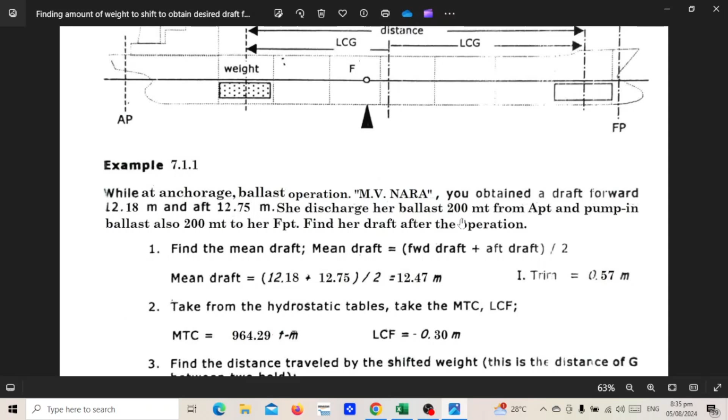She discharged her ballast 200 metric tons from after peak tank and pump in ballast also of 200 metric tons to her fore peak tank. Find her draft after the operation. So guys, like what I've explained earlier, that he's going to pump out water ballast in after peak of amount of 200 metric tons. So when he's done, pump out of 200 metric tons in after peak, then he will pump in fore peak tank of the same amount of 200 metric tons. Now, after the operation, entire operation, what will be your draft?

Okay, so let's start. Go to number 1. Find the mean draft. To get the mean draft, the formula is forward draft plus aft draft, divide by 2, then you will have the mean draft. So the forward draft is 12.18 and the aft draft is 12.75. You add these two, divide it by 2, then you get a mean of 12.47 and your trim will be 0.57. So let's check this, guys, with the program.

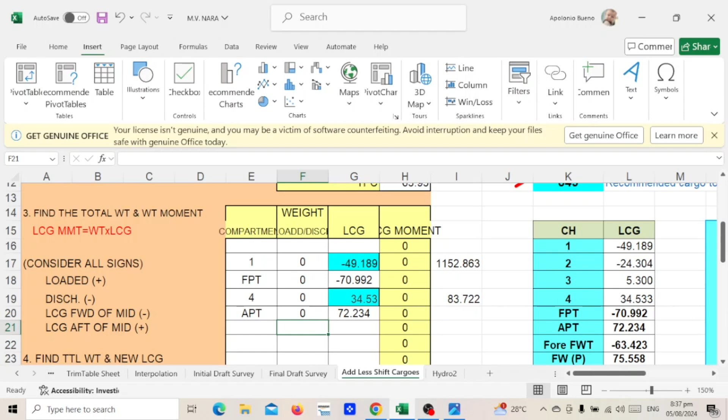Number 2, take from the hydrostatic tables, take the MTC and LCF. So when you say take the hydrostatic tables, it means the mean draft of 12.47. So from the hydrostatic table, we will go to check this 12.47. So we go to the hydrostatic table. Sorry, hydrostatic table. 12.47. Okay, let's go here. This one. 12.47. So we go up.

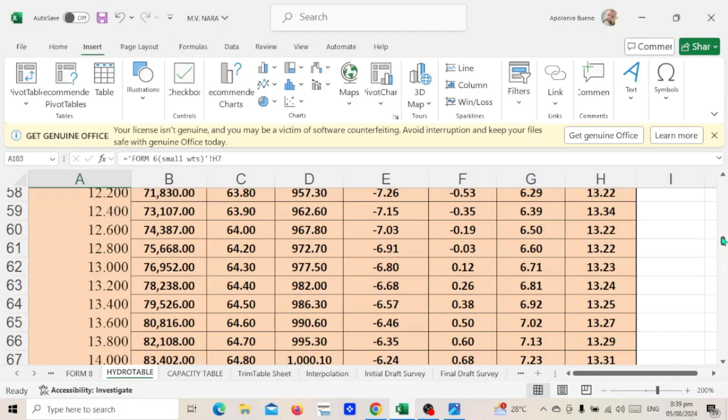12.47. So go up. So here, so 12.47 is in between 12.40 and 12.60. Okay, so the MTC is here, and the LCF is here, the F and D. So we go to 12.47. So 12.47 is between 40 and 60. So that will be D in between here and F. Okay. LCF. But we have already a graph here for interpolation way down below and here 12.465. Sorry, 12.465. 12.465. Let me check here. Here, 12.465. Meaning 12.47 run up and 57 trim. Okay.

So what will be the MTC? MTC is 964.29. 964.29. 964.29. That's correct. And LCF is 0.30, negative 0.30. Okay, and LCF is negative 0.30. Okay, confirm.

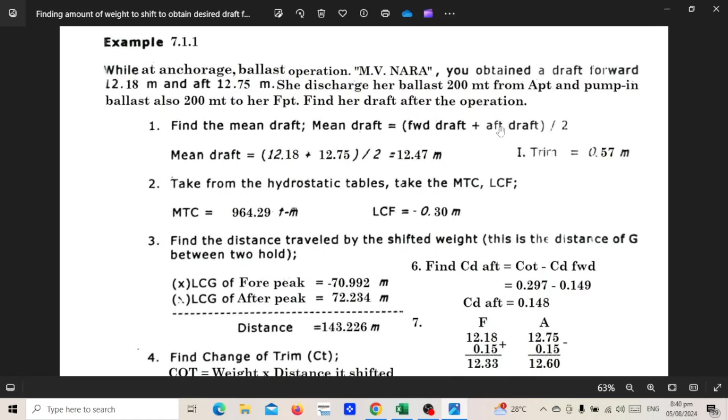So number 3, find the distance traveled by shifted weight if this is the distance of G before between two holds. Meaning if this is your after peak tank and this is your fore peak tank, from the center of your fore peak tank and the center of your after peak tank, this will be their distance.

Okay, when you say LCG of fore peak, it starts from the center of flotation or at the center, going forward to fore peak at the center of the tank. So that is your distance of your for peak or LCG.

And the LCG of the after peak tank is from the center of flotation or from the center or amidship going to the after peak tank. That will be your LCG of your after peak tank. So your LCG of after peak tank and LCG of for peak tank, you add this together, that will be your distance from after peak to for peak tank.

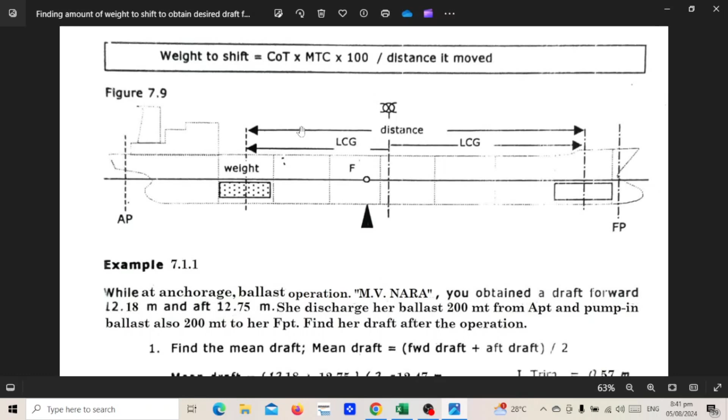Okay, so that will be your distance. So here the LCG of fore peak tank is negative 70.992 because it is the forward part, and after peak tank is 72.234 because she is in the aft part, that's why it's positive. So you add this together, your total distance would be 143.226 from the middle of the fore peak tank to the middle of the after peak tank. So that will be your total distance.

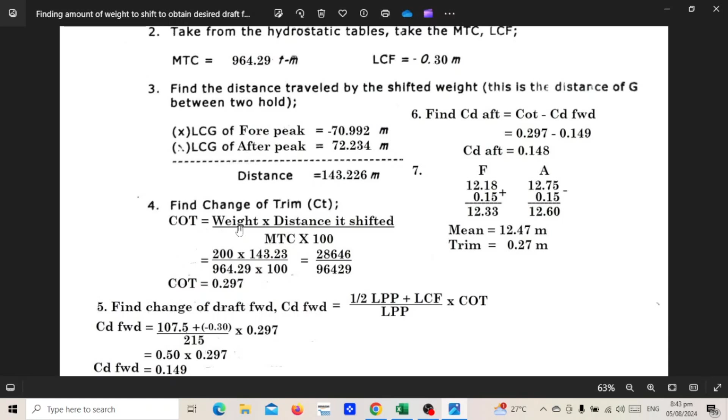So we go to number 4. Now we find the change of trim. The formula is weight times distance shifted, over MTC, times 100. So with this formula we have already the weight. The weight is 200.

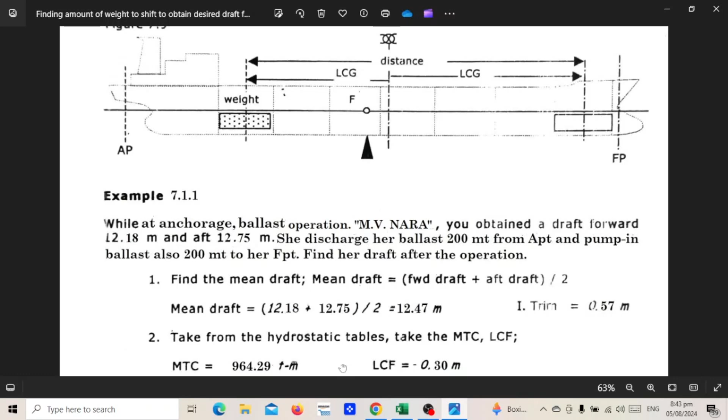So weight 200 times distance shifted, that will be 143.23, over MTC. What is your MTC? It is 964.29, times 100, which is a constant. When you multiply this together, you have 28646, and when you multiply this one with 100, then you have 96429, and your change of trim would be 0.297. This will be your change of trim.

Now number 5, find change of draft forward. So you have to find the change of draft forward, and the formula would be 1/2 LPP plus LCF, over LPP, times change of trim. Okay, so your LPP is 215. 1/2 of this 215 is 107.5. That's why it's called 1/2.

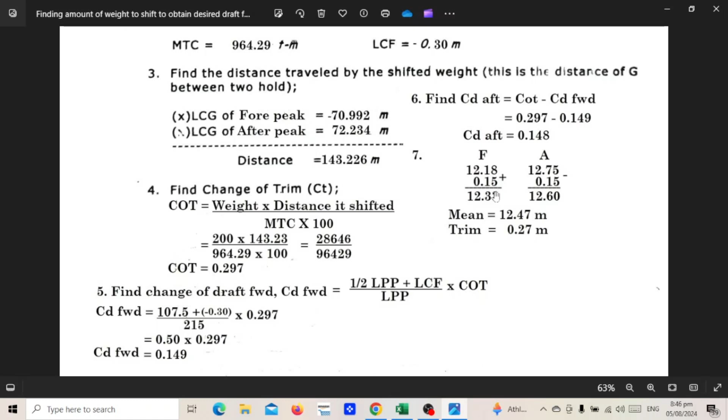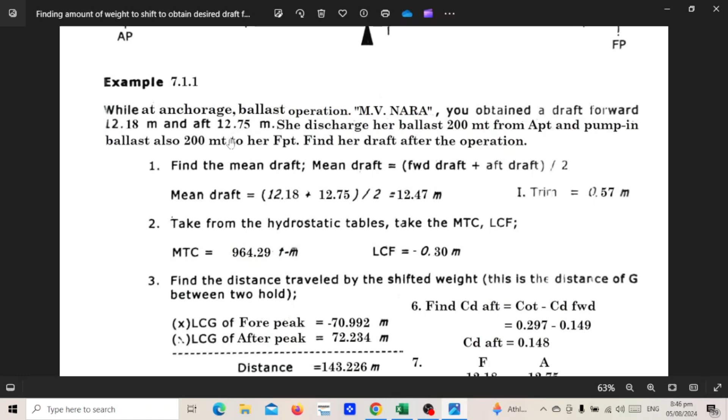Since you have this change of draft forward and aft, we will apply it here. With your initial draft of forward 12.18 meters and aft 12.75 meters. So here you put the forward draft of 12.18 meters and aft draft of 12.75 meters.

Then you apply the change of draft forward. What is the change of draft forward? It is 0.149, that will be 0.15, and change of draft aft will be 0.148, which would be the same of 0.15. You notice they have almost the same change of draft.

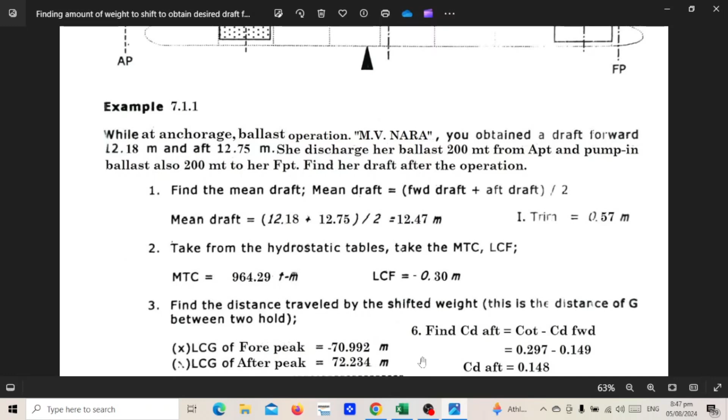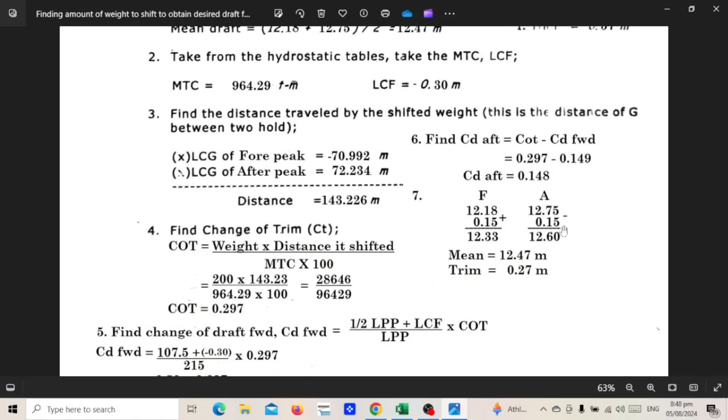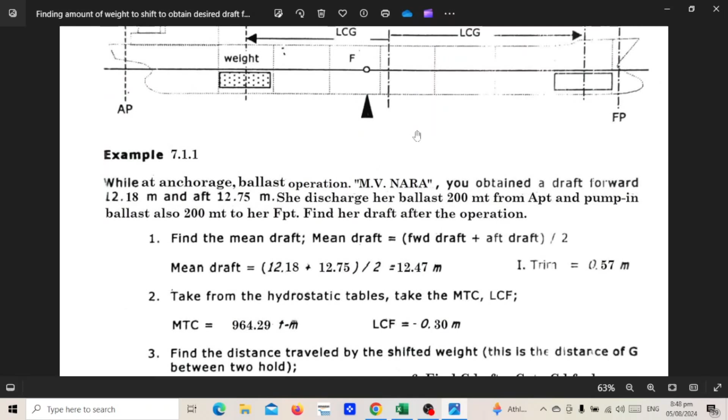Why? Because they both have the same weight, 200. She discharged her ballast of 200 from after peak tank and pumped in ballast of 200 metric tons to her fore peak tank. So they have the same amount or the same weight of ballast, that's why here they have the same amount of change of draft forward and aft. Now, why is aft negative or minus sign? Because when you take out weight in your after peak tank, you take it out, the tendency of this vessel's aft part will rise because you have taken out your ballast here of 200 metric tons.

Okay, once you take out ballast here, the vessel will also rise. Once this is done, the tendency of the forward part will sink.

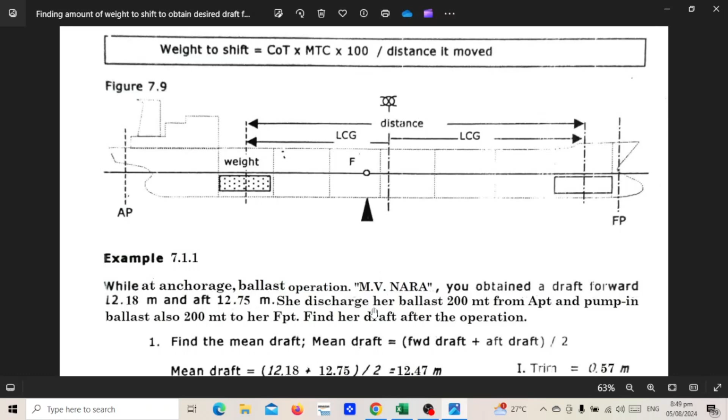Or we add draft. So when this goes up, this goes down. The center is like a pendulum. When this rises up, this will go down. That's why in the forward part, forward you will add, because the vessel forward will sink and the vessel aft will rise up. So it's a pendulum, this will rise up and this will go down. That's why you got here a negative sign and forward will be a positive sign.

So with your change of draft forward and aft, you add this, you subtract this from your aft draft. Then you will have an aft draft of 12.60 and forward draft of 12.33. Then you have a mean of 12.47 and your trim of 0.27.

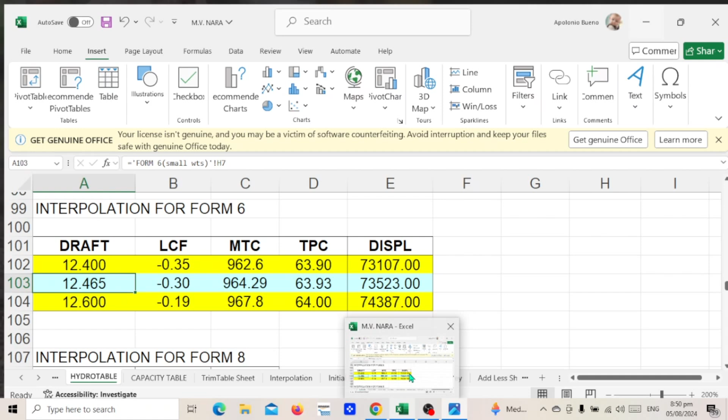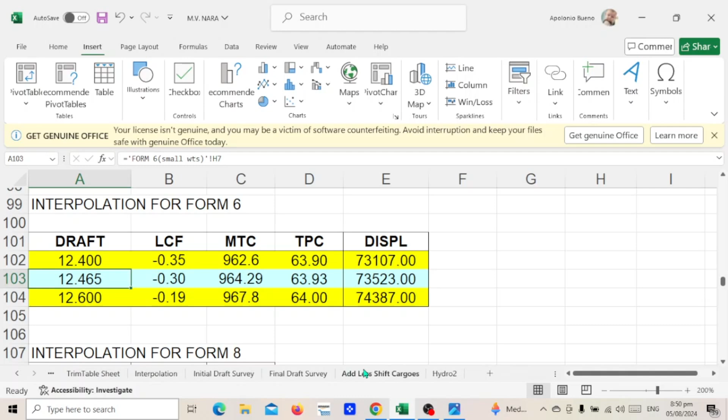So let's check with this, guys. Let's put first forward 12.18 and aft 12.75. So you have 12.75, 12.75. Then you have a mean draft of 12.47 and a trim of 0.57. Check. So your mean draft is 12.47 and your trim is 0.57, which is confirmed and correct.

Then the problem says he wants to pump out the after peak. So you pump out 200 metric tons from the after peak. Since it is pumped out or discharged, when you discharge weight, that will be negative. So we put here a negative sign.

So what will be the draft after he has taken out 200 metric tons from the after peak tank? What will be his draft? His draft forward would be... I'm sorry, his final draft will be 12.22, and his draft forward will be 12.22, and draft aft will be 12.64 after you have taken out your ballast.

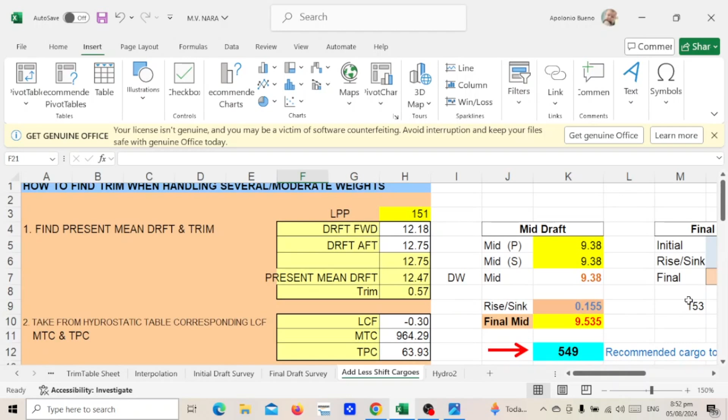Again, this is your initial draft, and you pump out 200 metric tons of ballast water from the after peak tank. So the after peak tank will rise and the forward will sink down. So what will be the final draft? The final draft would be forward 12.22 and the aft draft 12.64.

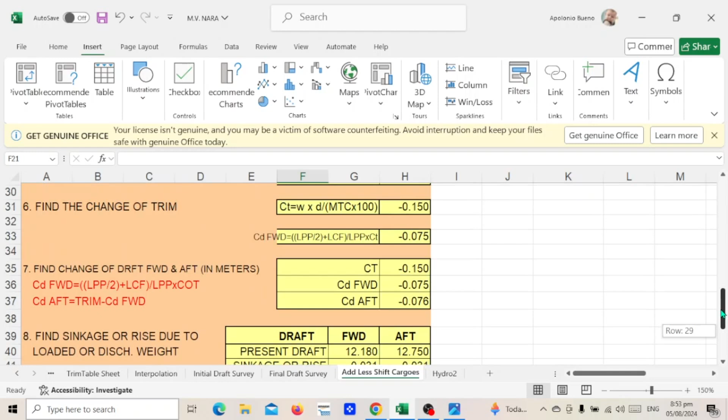Okay, so let's change now the draft, because we have done with pumping out the after peak tank. So this will be 12.22 and 12.64. This draft means you have already pumped out the after peak tank, that's why you have already this draft. So to make it clear, or remind you, with this draft of forward 12.22 and aft draft 12.64, we have already pumped out 200 metric tons of ballast water from the after peak tank.

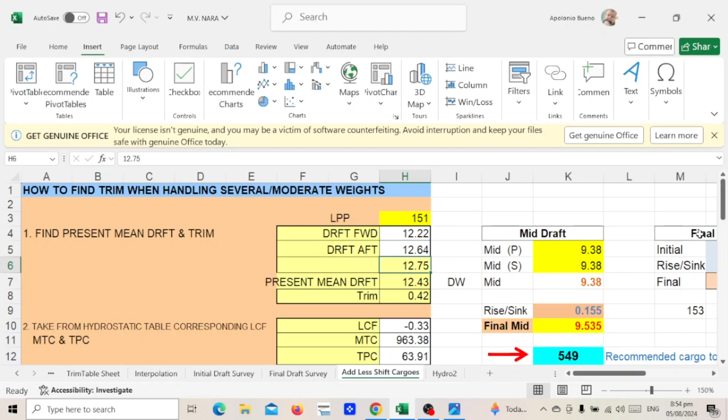Now we will put 200 metric tons in the fore peak tank. So this one is already done, finished, that will be zero. And we will pump in - when loaded, that will be positive, or pump in. We will pump in 200 metric tons in the fore peak tank.

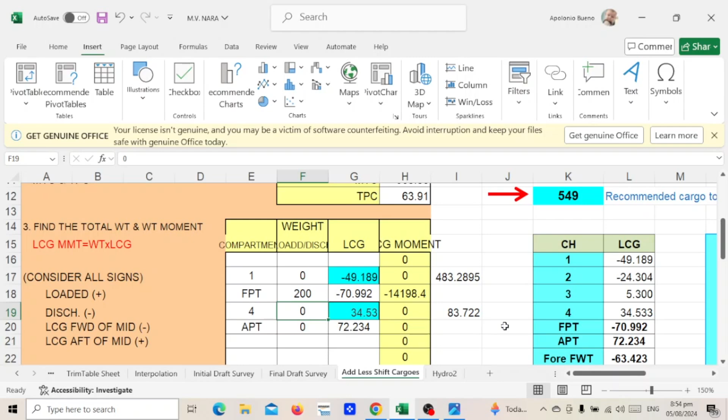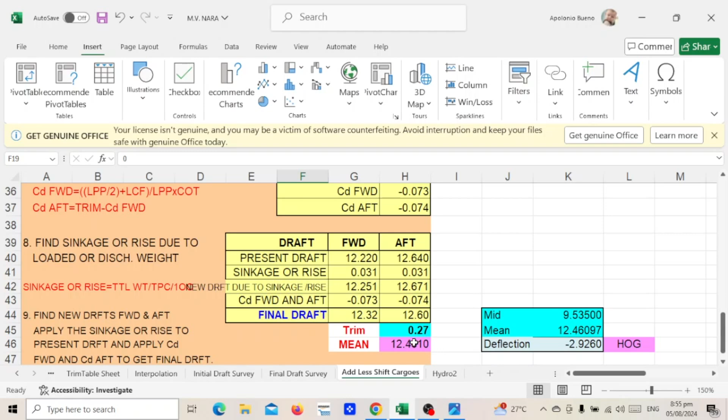So when you have completed pumping in ballast water in the fore peak tank, what will be your new draft? Your new draft forward will be 12.32, and aft draft will be 12.60. Your mean draft will be 12.46, and your trim will be 0.27. Again, I repeat, forward draft will be 12.32, your aft draft will be 12.60, and your mean draft will be 12.46, and your trim will be 0.27, because you have already pumped in 200 metric tons in the fore peak tank.

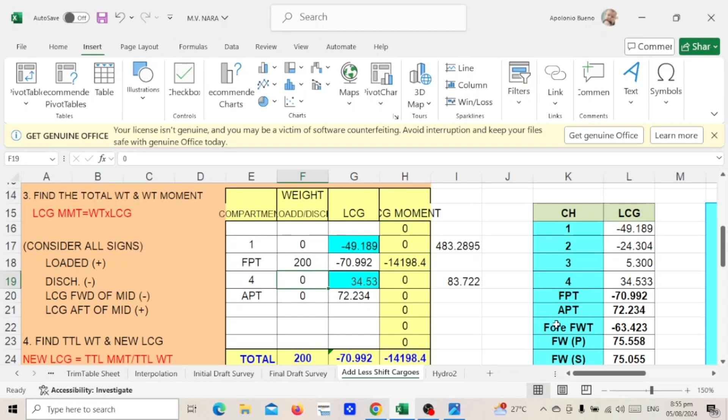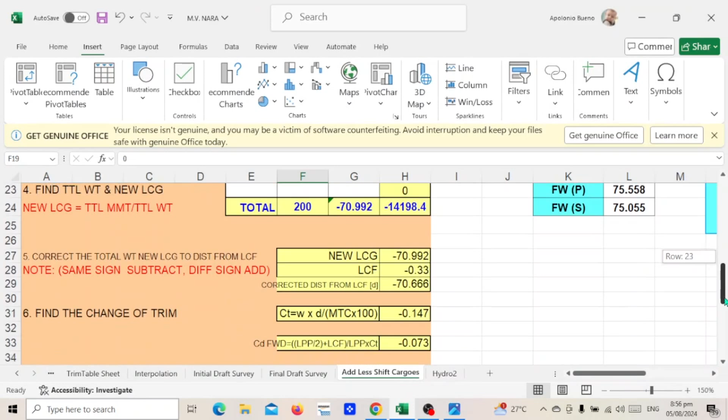Okay, so let's investigate, guys, let's check. So his final draft here upon applying the change of draft forward, change of draft aft and forward - the program's draft forward says 12.33, what we get is 12.32. And on the aft draft is 12.60, and his aft draft here is 12.60, the same. And his mean draft is 12.46, mean draft is 12.47, and trim is 0.27, and trim is 0.27.

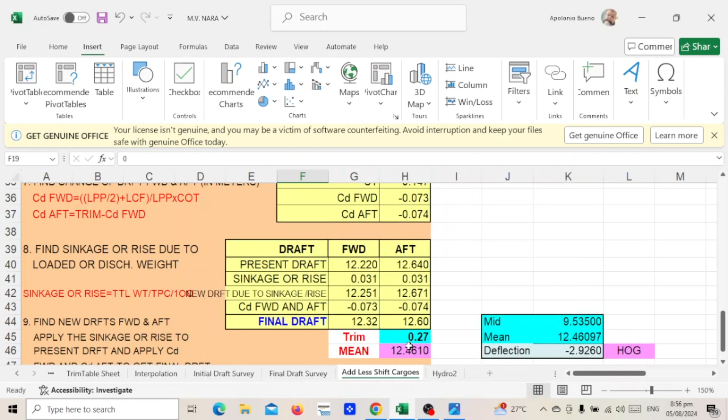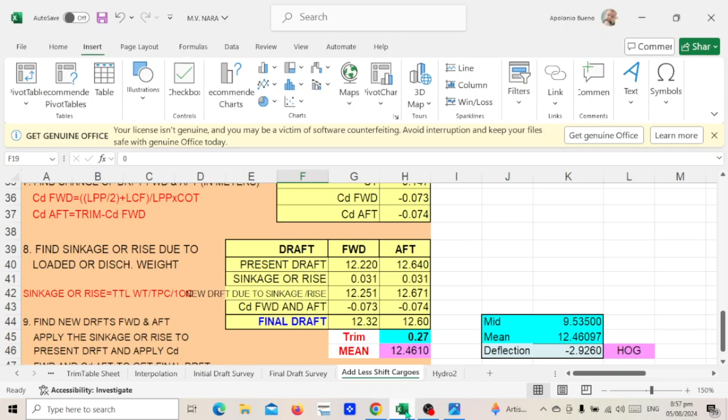So I would recommend, if you could do this manually, I think this is, for me, it's also 90% to 95% accurate. But with this program, I would say this would be about 98 to 99% accuracy, because it is already programmed and the formula is within the program, so you don't have to do it manually. So in this manual computation, you can have some errors, but if you put in the right data, this will also be very accurate.